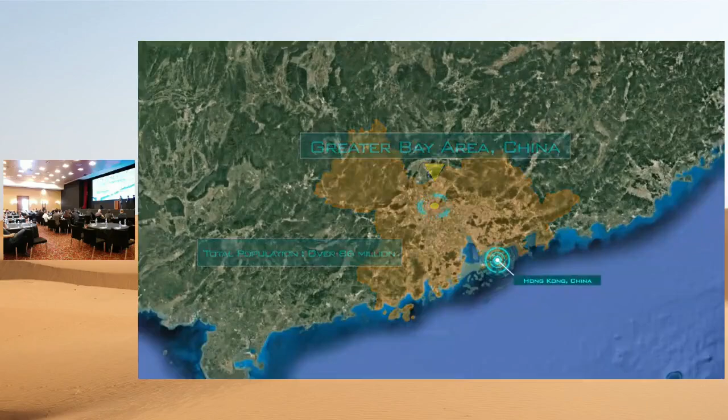This is Simon Lee, Director of Kai Tak Sports Park Limited. We are deeply honored to be here today to share with you Kai Tak Sports Park, an integrated sports, cultural, and entertainment facility in Hong Kong. The entire sports park covers an area of 28 hectares. It is part of the redevelopment of the former Hong Kong International Airport in Kai Tak.

It aims to serve its users and visitors, both foreign and domestic, and including the Greater Bay Area in China, with a population of about 86 million. Kai Tak Sports Park is a design, build, and operate contract, with Hip Hing Engineering appointed as the design and build contractor. The sports park featured a 50,000 capacity main stadium, an arena hosting sports and entertainment events, together with a youth sports ground, all complemented with extensive green and open area.

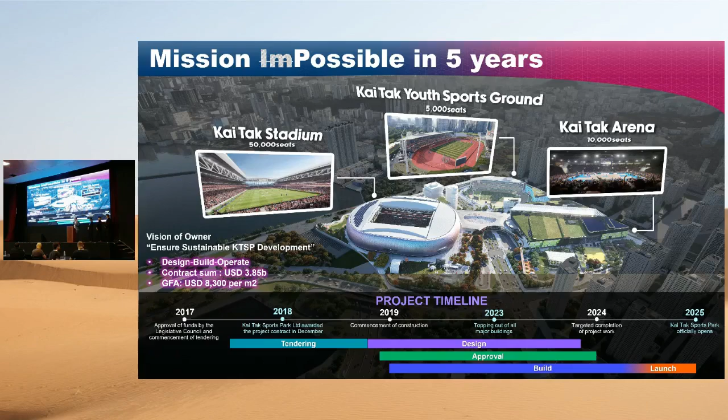Without the adoption of the openBIM approach, it is almost impossible to complete this project in only 5 years. A project at this scale and complexity requires expertise and professional know-how from a team of designers, contractors, and most importantly, BIMers. During the process, we have put together over 500 BIMers from around the world, all working together as one team. Just for Hip Hing themselves, at the beginning of the project, they managed to put up a BIM management team of over 50, whom eventually have all acquired the openBIM professional certificate.

These achievements encourage us to make further steps as we move on and bring our openBIM strategy in future projects to yet another level. Now I turn over to Billy. Thank you, Simon. So, hi, everyone. I'm Billy from Hip Hing Construction.

So for this project, we have many modularized parts in the sports park. Starting from the roof to the ground, we have a retractable roof system and the facade lighting system to brighten the Victoria Harbour. And the retractable roof system also can accommodate different weather conditions. And besides, we also have a mechanized seating system and the lay and play turf to accommodate different activities and events.

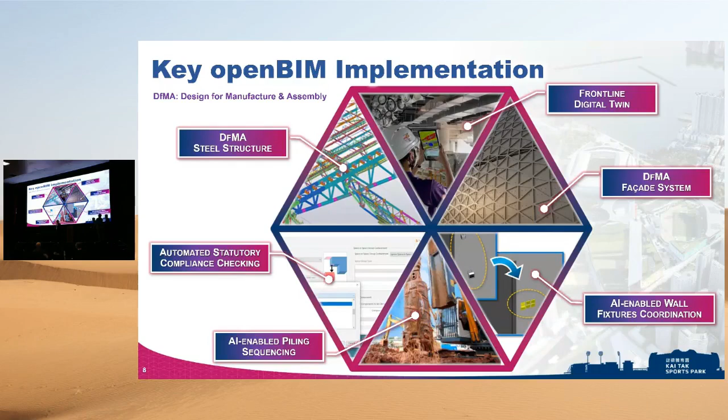And on your right-hand side, from the architecture perspective, we also use AI to help us speed up the wall fixture coordination and joint generation. Also, the facade system uses the DFMA concept to optimize the design. And last but not least, the digital twin: we use the digital twin to do the site verification to help make the works faster and smarter.

And this is our software ecosystem. Today, we are in the construction category, so we'll focus on construction parts. And in this project, actually, we have 7,000 piles that we had to finish in half a year. In this congested time frame, we had to make sure everything made it on time. At that moment, nearly all the piling machines came to the site to secure our project. And the deepest pile is over 100 meters deep.

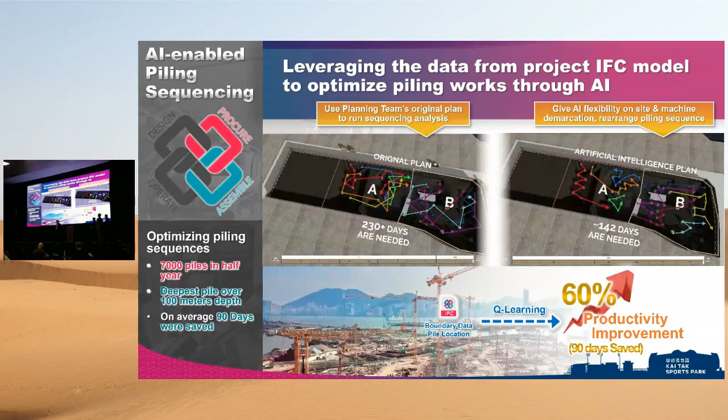By utilizing the IFC standard data structure and with AI we customized ourselves, it helped us speed up the total piling sequence by 90 days. And this is the before and after results. Let me pass the mic to Joe. Yeah, thank you, Billy. My name is Joe Lee.

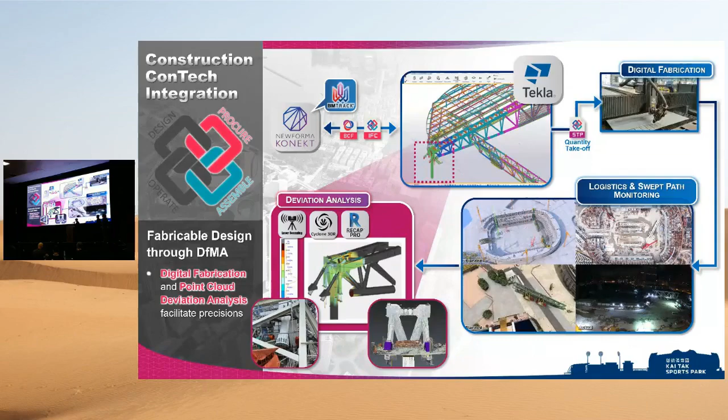As mentioned by Billy, in the openBIM implementation summary, we have adopted digital methods from foundation to superstructure, focusing openBIM in fabrication. Selecting capable subcontractors with digital processes is essential for enhancing productivity and safety. We utilize DFMA for our sports park mega truss construction, which allows for details enhancement through BIM. Frequent data exchange occurred between consultants and manufacturers.

We conduct simulation and quality checks during installation, extensively using laser scanning to ensure the accuracy and facilitate open data conversion.

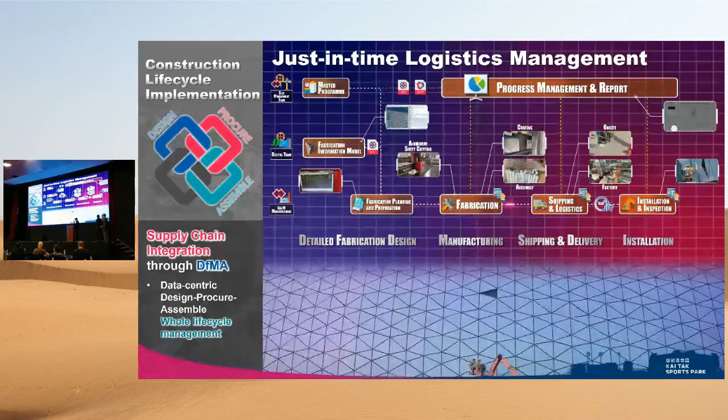Regarding DFMA, one of the big challenges is managing and monitoring the logistic and manufacturing data schedule. We assign the unique code for each facade panel from day one. In terms of monitoring methodology, only an open data format approach enables all dynamic data to go through the entire process. This approach aims to achieve an intelligent reporting system and accomplish the just-in-time strategies.

Furthermore, we established a BIM cave for the project, which has significantly changed the mindset of many of our colleagues, including frontline staff, designers, consultants, and operators. Feedback from them consistently indicates that this marks a significant step forward and enables all stakeholders to utilize BIM across various channels. Clearly, the entire process relies on the openBIM approach. You can see the data and file conversion flow through openBIM in the flow chart at the bottom.

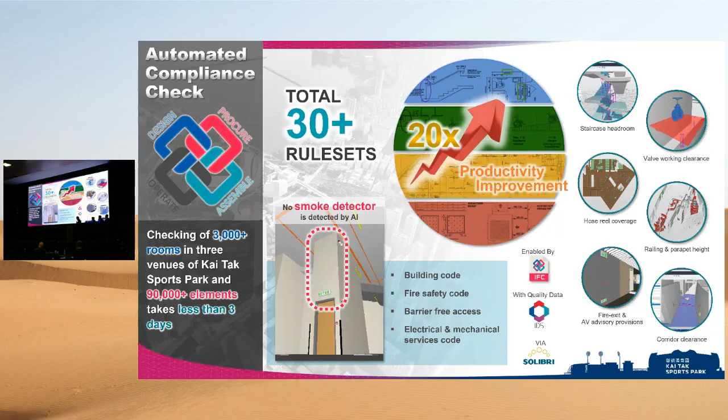This is Kelvin. Other than the construction technology Joe just mentioned, we also leverage the information model onto automation tasks. Under a compact time frame, design and construction detailing must be conducted concurrently. It's crucial that each detailing iteration can both fulfill requirements and be constructible. With quality data in the IFC model, over 30 crucial rule sets were developed to facilitate statutory compliance checks. This example shows a smoke detector is not found near the exit door, which is a local statutory compliance requirement. 90,000 elements in 3,000 rooms are checked within 3 days. This results in 20 times productivity improvement and safeguards code compliance checks along the project lifecycle.

Kai Tak Sports Park is not a typical project, with rooms mostly not repeatable. The sports complex has extensive IT infrastructure design. Huge amounts of wall fixtures need to be coordinated aesthetically and for constructability. With 1 week of proof of concept, the general coordination of over 100,000 wall fixtures in 5,000 rooms is completed in 6 months through AI. 12 months were saved, and it's equivalent to 3 times productivity improvement. Through quality project data in open formats, innovation is catalyzed, and we were able to think deeper and further to achieve more.

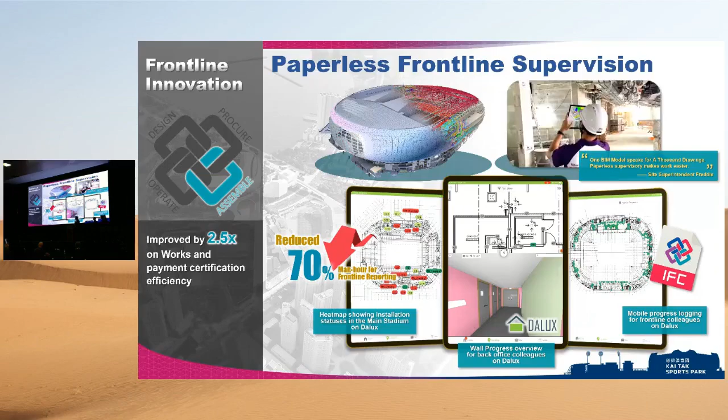Other than data openness, frontline and back office teams are also seamlessly connected in this mega project. Through IFC-compatible lightweight mobile platforms, the team can share progress and information, facilitating paperless progress monitoring and inspection, as well as works and payment certification. The extensive availability of open data also enables the team to set up a platform for data-centric analytics and a management portal. From various sources, data are extracted, transformed, and loaded to provide information for prompt decision-making processes, which include progress monitoring, environmental monitoring, and safety management. Through Esri ArcGIS, this data can be further augmented with IFC models, helping the team to be comprehensive in site management in terms of progress, safety, and sustainability.

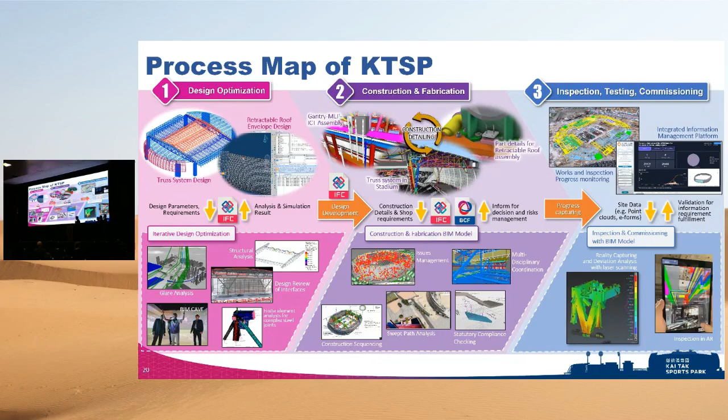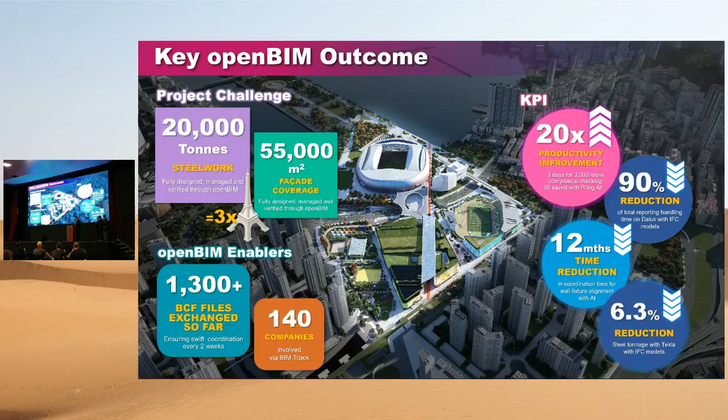This is an overview of some key processes along the entire project timeline, until where we are now at the final commissioning stage. With open formats such as IFC and BCF, the team's construction expertise has been utilized efficiently in this mega-scale project, permitting information exchange between processes to improve project efficiency, from design, procure, assemble, to the current imminent operation stage. In this project, which is extensive in facade and steel systems, equivalent to 3 times the Eiffel Tower's steel tonnage, project efficiency has been enhanced via more seamless collaboration amongst over 140 parties connected via the BIM-based BCF format. This has helped us in various project execution metrics, such as 20 times productivity improvement, 12 months reduction in manual coordination time for wall fixtures, and a 6.3% reduction in steel tonnage of the design.

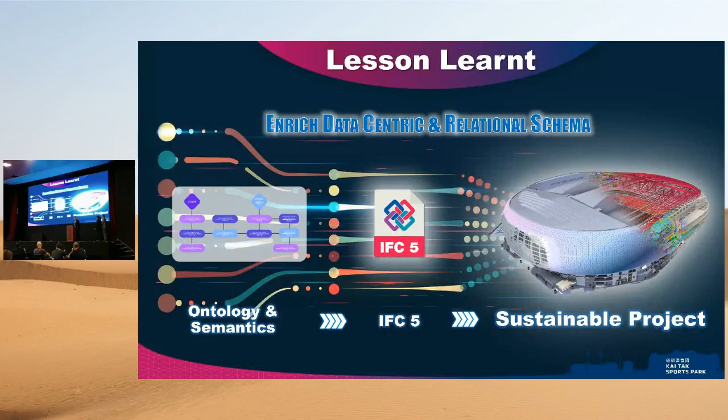In the journey so far for the Kai Tak Sports Park project, for a project of this scale and special nature, the team has learned from scratch the relationship of data, assets, and systems that are unique from other types of common developments. In addition to today's opportunity, we will continue to gather and share our lessons learned with the openBIM community for the coming developments of the next generation of IFC.

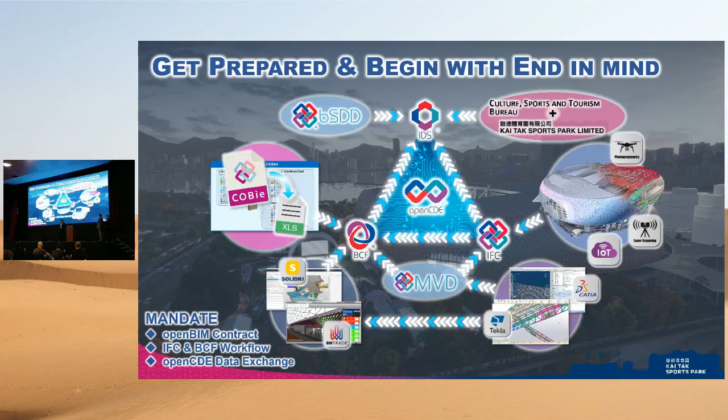It's just like the Rugby 7 match. We should have a policy. The IDS and bSDD set up the rules of the game at the beginning, and we should have a process and strategy by utilizing IFC and BCF. And last but not least, people. People are very important. They should get well trained before they start this rugby match, so make sure to get a professional certificate.

And the most important thing is we should have a platform. An open CDE platform will help us centralize all information together. It's just like the rugby court.

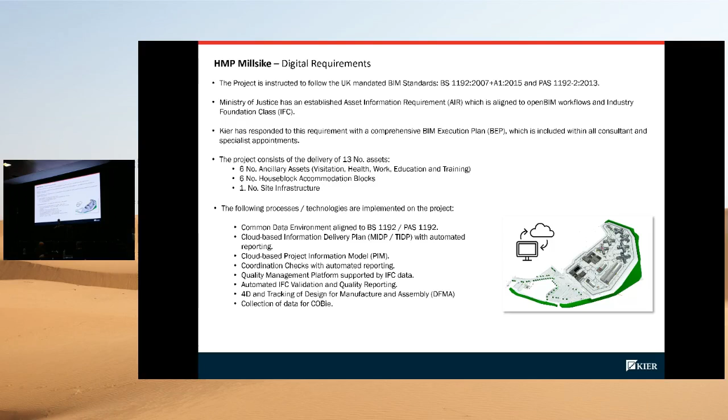We also have a quality management platform, which is supported by IFC, and we use that out in the field to have a paperless site. And we've got automated IFC validation and quality reporting with Power BI. In addition to that, we have 4D, and we've also managed to track all our DFMA components with a digital twin as well. And finally, after we've collected all that data, we are producing COBie.

So some information about our BIM information. This is our model breakdown. We have approximately 205 models. It might change because we've got handover in 4 months and we've got a few tweaks left to do. We have 13 overall asset models, and you can see them there, each with their little red tag against them.

Currently in our project information model, we have over 14 million lines of property data. We have 1.5 million classification codes, so that's Uniclass, NRM, SFG20. SFG20 is the maintenance regime classification system that's used in the UK. We've exchanged over 234 BCF files. We've resolved about 5,730 clashes.

Now, when we add our whole data requirement, which includes all sorts of things within the IFC file, so including layers, classification codes, properties, attributes, we're looking at 34 million lines of data that we're checking every 2 weeks. So that's quite a challenge, and to do that in Solibri is very difficult, particularly when we are a team of 3 people. So what we've done is we've built a data quality pipeline. So we've been able to ingest the IFCs, and we've been able to validate them automatically.

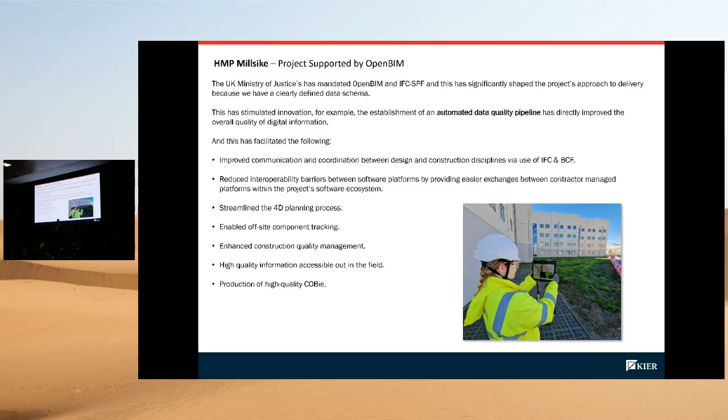So what we've been able to do, because we have openBIM on the project, is we've been able to improve communication across the board. So we have access to information from all sorts of applications, and I'll show you the software map in a minute. We've reduced interoperability barriers between those platforms because we have an open environment to work with. We've streamlined our 4D planning process. We've enabled our offsite tracking. Obviously, we've got quality management, and we're using those models out in the field, as you can see in that nice little picture. And we were able to produce COBie.

So what does that pipeline look like? We've used a combination of Python, IfcOpenShell, and Power BI. And we've effectively built an automated pipeline to be able to check, validate, and clearly communicate the client's data requirements. This has simplified, sped up, and automated the whole check-in process. And we've done all this before the development of IDS was a thing. So we thought we were a step ahead of the game, and as usual, we're not.

So the great thing about this is that we've been able to take the IFC data and visualize it in Power BI. We've been able to educate and upskill our whole project team. That's improved the knowledge of IFC quite dramatically. And because it's in such a simple, easy to use format, which I'll show you in a second, it's really boosted our ability to deliver this data. And it's also starting to give us the confidence and the assurance that it can be relied upon within our other applications. Because part of the challenge we've always had is the I in BIM, and people not believing or not trusting it. And therefore, this process that we've developed really helps that.

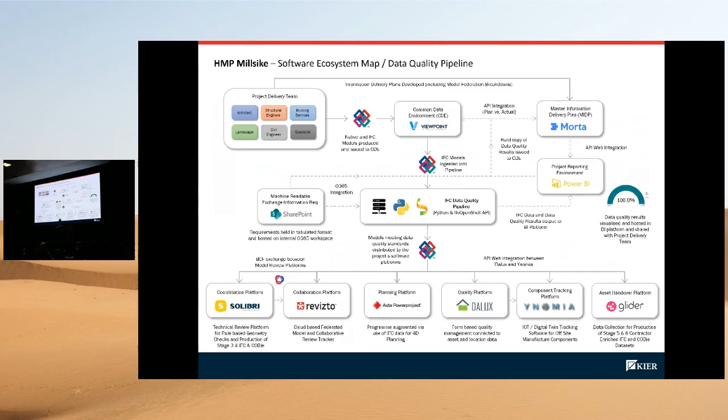So unfortunately, because it's a live prison, I can't really show you any of the live application or any of the data that's in there. So some of the stuff in here is blurred out, unfortunately. But effectively what we've got is a report that's in quite a simplistic view to begin with. And then we can drill into individual models or disciplines or particular parts of a model file, and we can see a summary of the data quality.

Everything here is presented in plain language. So if there is a problem, it tells you what the problem is. For instance, if it's a duplicate value, it will just say it's a duplicate. What we're trying to do here is dispel the issues that we have with complexity around rule sets and general BIM, and just get to the root of the problem.

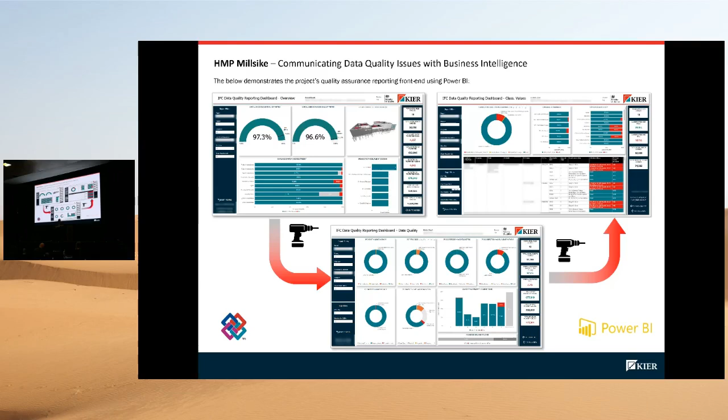So once we do that, we can then drill into the data. We can then report on that, and that gives people sort of a punch list to fix. So sort of our key outcomes from the project.

So overall, it's reduced complexity, like I've said. We've got better reporting upstream. So I can now report to my boss, have we got a good or bad model? I can say we've got a really good model, we've got a really bad model. We can also report downstream to the model suppliers and tell them precisely what's wrong. This has sped up the whole process. It's fully automated. It's literally 2 buttons to press.

So we've removed the need for manual reporting. It's all hosted online, so it's easily accessible within our security requirements of SharePoint, obviously. It's boosted the overall understanding of IFC. Basically, we've removed misunderstanding from the project because all parties are on the same page, because we're all singing from the same hymn sheet.

So some of the things that we've been able to do, and I've got 3 minutes, so I'm going to rattle through these now. So because we have high quality data in our models, the IFC entities, predefined types and classification codes, we've been able to implement a really cool checking system where we can check certain objects against other certain objects. And when we pick that up, we can share that via BCF into Revizto. We've got almost 250 active users in the platform, and like I've said, we've cleared off 5,000 clashes.

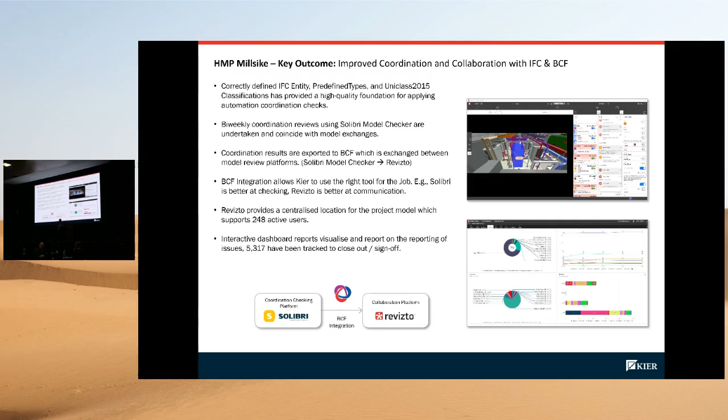So our Vynomia component tracking, which I think is very, very clever tech. What we've been able to do is connect Vynomia, which is a DFMA platform, to our common data environment, to Dalux, and what it does is it tracks the components from manufacture to install. And it also tracks design as well. So here in this little card at the top, you can see if the design is rejected, accepted, and also whether or not it's been installed on site, and it's all connected via nice integrations.

Now, we wouldn't have been able to do this without IFC because the information checks that we have in place allow us to validate to make sure we've got uniqueness in every single one of those precast panels. If we didn't have that, we would really struggle.

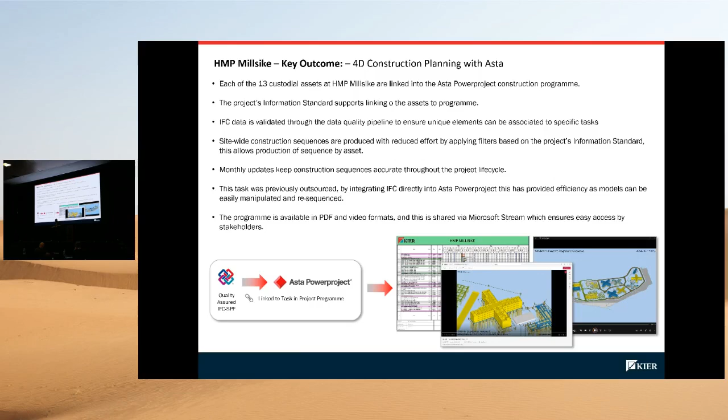So another problem solved here is that because, again, we've got high quality models with a lot of spatial data in, we've been able to streamline our assets and link it back to program using the unique identifiers that have been specified by the client. We've done this with Asta. It's still quite a manual process, but we've done some cool stuff by linking the programs into Microsoft Stream and sharing it across the project team.

Finally, the last slide, I've got 1 minute left, so I'll try and wrap this up really quickly. So we have Glider BIM as a platform. It's a digital handover platform that allows us to enrich the data within our IFCs. Throughout the whole project, we've been progressively collecting the IFCs, checking to make sure they fit the schema that we've been issued. And once we are sure that they fit the schema, we get all those entities work packaged, split up, divided, and sent out to trades.

Trades then will come in to enter all of the serial numbers, all the warranties, all the barcodes, all that sort of good stuff that we find on site. And then we collect that via the Glider BIM platform, which then allows us to enrich the IFC files and output the data to a really high standard, and then produce a COBie document, which we issue to the client.

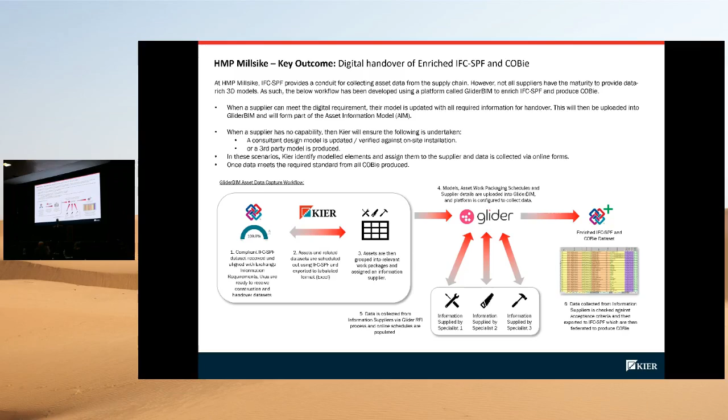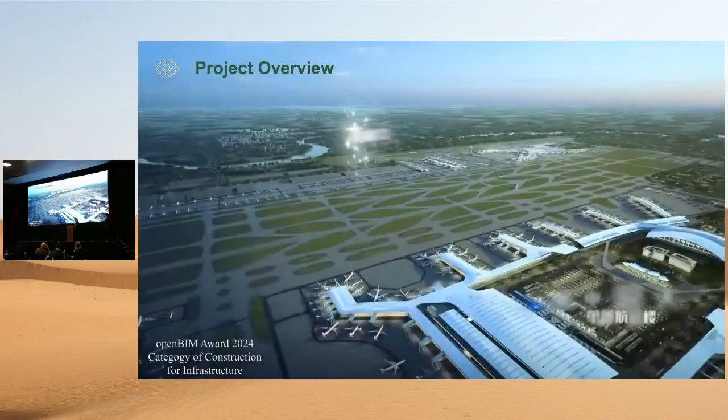Guangzhou Baiyun Airport, one of the 3 major hub airports in China, ranked first in passenger traffic in China for the last 4 years and globally in 2020. Its third phase expansion project, with about 7 billion euro investment, includes 2 4E-class runways and the largest single terminal building, making it China's largest ongoing airport project.

As this is a large-scale and complicated linear and vertical airport project, we have to deal with collaboration issues among a diverse range of engineering types and numerous stakeholders. By identifying key challenges, we adopted openBIM standards and formulated a tailored solution: IFC for data exchange across different software, bSDD for standardized terms, IDS for consistency of information requirements, BCF for easier communication and issue tracking, and OpenCDE as a single source of truth.

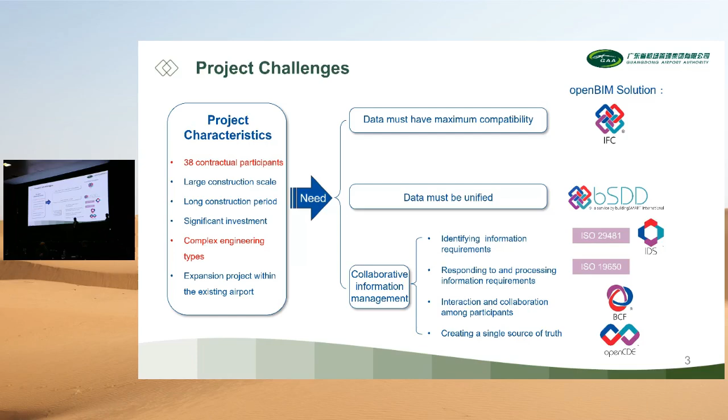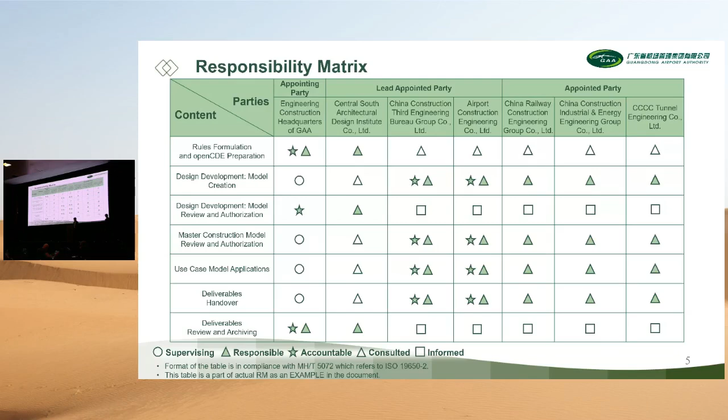By in-depth study of openBIM standards, international standards, and industry standards, we established our project's standard ecosystem. It integrates various requirements from project management, data exchange, and execution level, providing strong guidelines for decision-making. Here's the responsibility matrix of the project, following ISO 19650, which plays a key role in project management, not only in decision-making, but also helps prevent overlap and supports accountability.

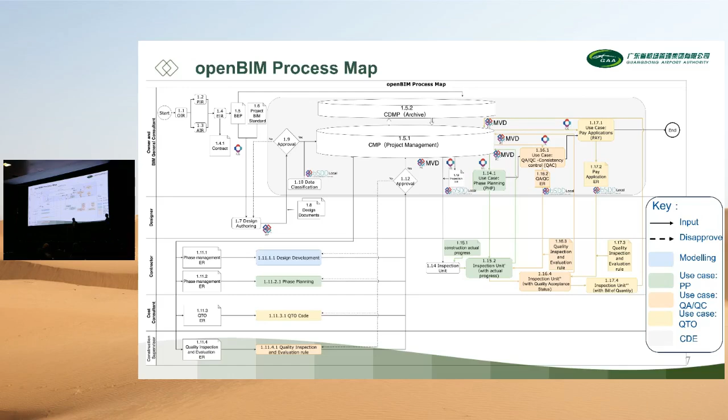In the project's openBIM process map, the entire workflow starts from the responsibility of each participant. The core of model-based construction management is to focus on 3 main applications: progress management, quality management, and payment management. Technical applications developed for openBIM involve the management of data and eliminate disconnected workflows. We established a construction management platform which serves as the CDE in this project, referred to as CMP. IFC is used as the intermediary data format to manage and store model files in CMP. We also adopt an IFC validation service to improve data accuracy.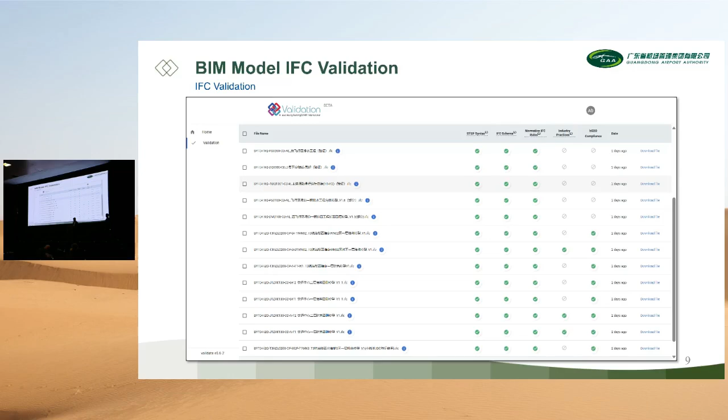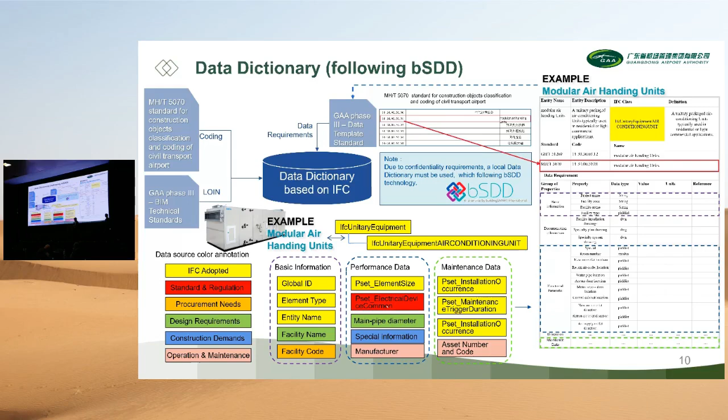Since the working language for project implementation in China is Chinese, and due to confidentiality requirements, we could not directly use bSDD. However, we follow the bSDD technical framework to establish a local data dictionary. Based on the objectives and scope outlined in the BEP, we sought out information requirements from the project's whole life cycle. For the general data already published on bSDD, we translated and adopted it. For personalized data which needs extension, we extend the requirements to formal data templates. Currently, we have already completed over 5,000 data templates.

Here's a list of use cases in the construction phase of the project. Today, we are going to share some special ones. Non-suspend flight construction must be one of our core targets, as this is an expansion project, and we have a tunnel project across 6 operating runways. So how to ensure the normal operation of Terminal 1 and Terminal 2 is crucial. Models from different vendors were integrated with IFC files to form a simulation model. Combining shield tunneling technology, construction schedule, and real-time flight information, we developed a non-suspend flight construction plan. Relevant data was published and exchanged on the CMP, enabling the following execution and supervision works.

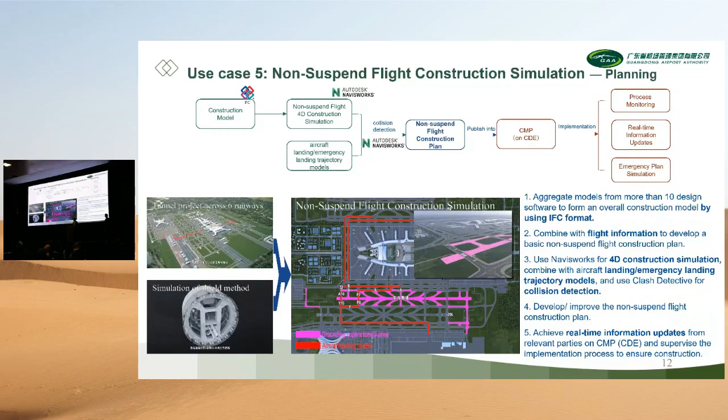Additionally, electronic fences based on BIM and GIS data were adopted in CMP to replace physical barriers in sensitive zones.

Use case 6 is an innovative practice of this project. For most cases in China, construction is still carried out in a traditional way, highly reliant on construction drawings, which makes the BIM model just a 3D visualization tool. It is crucial to change this situation by finding a convenient and efficient way to connect construction works and model

units. Therefore, we established this use case, where we match a group of model units with a real object in inspection nodes, which we name inspection units, to realize model-based construction and acceptance. To do so, we adopt the ISO 19650 management approach for model breakdown planning and the openBIM workflow for project data delivery.

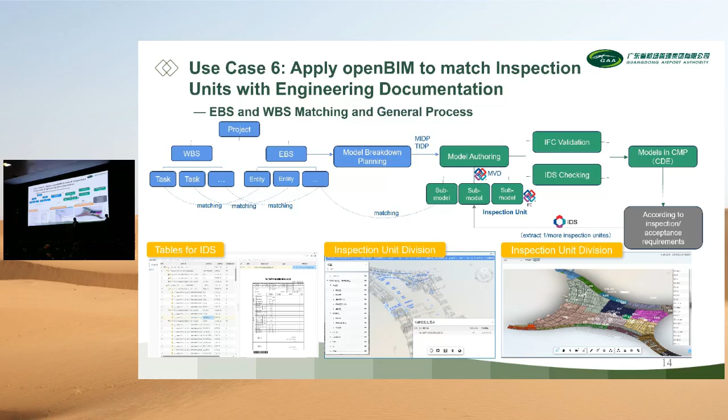Additionally, inspection units should have flexibility to adapt to the ever-changing conditions of construction sites. Hence, we extract relevant data and deliver the requirements to CMP via IDS. By flexibly combining and modifying related data in CMP, inspection units become more practical in real cases. In this process, IDS provides a precise description of information requirements, improving the alignment of information production.

To realize inspection unit-based construction management, it is necessary to predefine specific execution requirements in use cases. The execution criteria and rules are mainly from professional standards and have strong correspondence with relevant data in inspection units. By establishing an effective mapping relationship of them within the IFC schema, the efficiency of highly repeated works in quality inspection and quantity takeoff has been significantly enhanced.

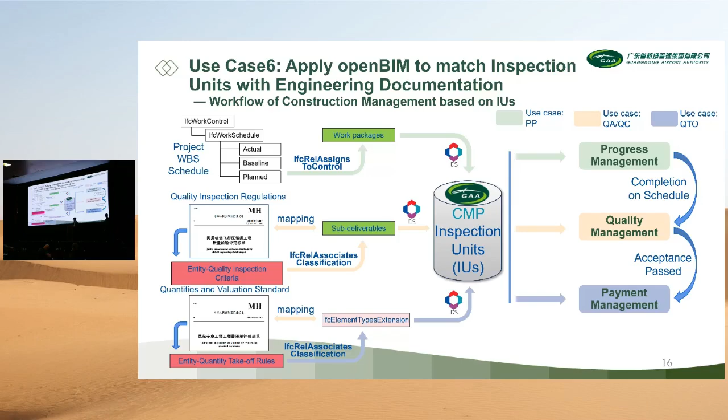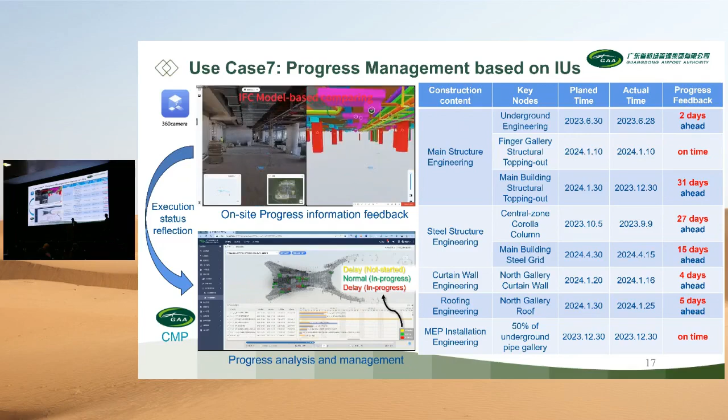For execution of progress management, managers can use 360-degree holographic images to match IFC models in the CMP to assist in construction progress management. IDS extracts the engineering object data that match the on-site construction conditions and continuously updates the data on the CMP, enabling real-time alerts and reminders. Impressively, most construction works were completed on time or even ahead of schedule.

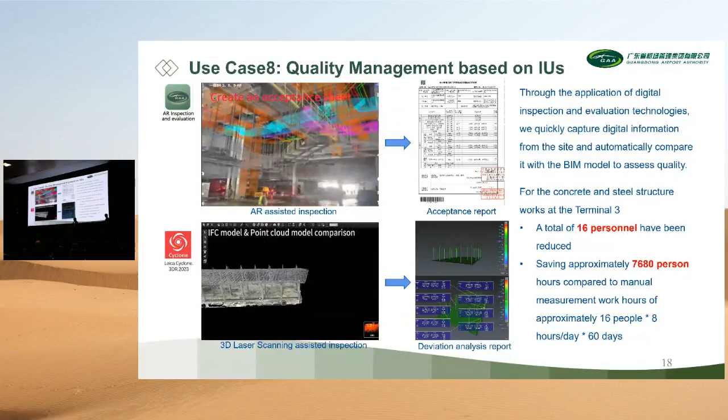In terms of quality management, by scanning QR codes to match the real object and the model, relevant model attributes and acceptance requirements can be quickly obtained. The AR tool can also conduct simple measurement works, and the collected data will serve as an important basis for acceptance materials.

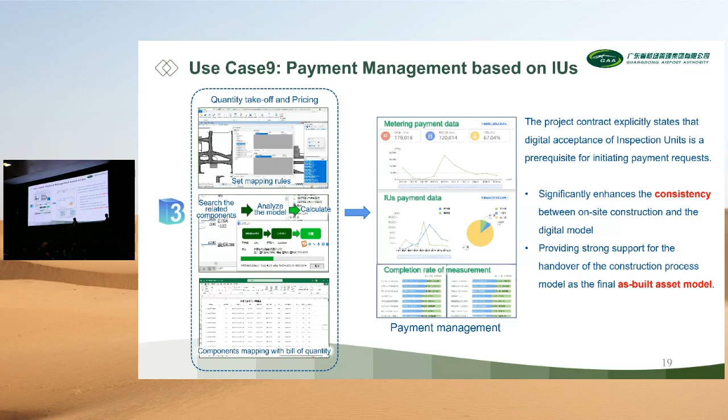Once the inspection units from quality management pass acceptance, the payment request can be initiated. The quantity takeoff software will generate the total price of each inspection unit by assessing model quantity, loss factor, and unit price, then publish it on CMP to assist payment management. All payment details can be tracked and finally summarized in the payment management dashboard.

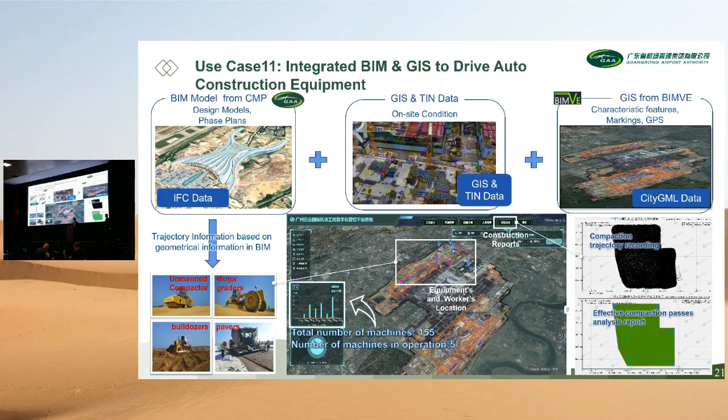In this project, a large number of intelligent devices are used for construction, with the most notable benefits coming from automatic plastering robots, with higher efficiency and better quality than manual works. To achieve more efficient intelligent device management, we seamlessly integrated GIS with BIM. Using IFC geometric data, we planned optimal trajectories for intelligent equipment, while GIS enabled real-time positioning and full-site operational monitoring. This not only gave us full control over the equipment, but also made the site management smarter. Here are the other use cases.

By comprehensively using openBIM, this project has achieved remarkable benefits. By adopting IFC, software collaboration numbers increased from 10 to 55, especially for some Chinese native software used in this project, which was established by some small-sized software vendors. These open and vendor-neutral resources contribute to the software diversity in the built asset industry.

Based on the more efficient and precise model-based collaboration methods provided by BCF, the coordination willingness of the model authors has significantly increased. Over 27,000 markup files have been exchanged, enabling designers to optimize a large number of design issues within a very short design cycle, thereby significantly enhancing the quality of decision outcomes. The comprehensive benefits are also quite outstanding, with notable achievements in saving investments, optimizing design, improving space utilization, enhancing measurement accuracy, and using smart devices to increase work efficiency.

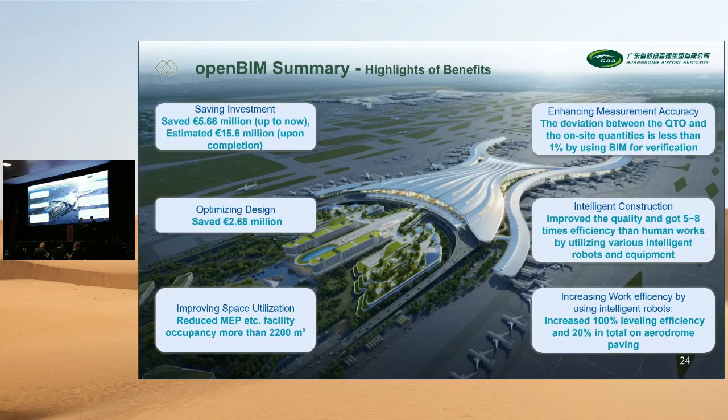In 2020, we organized over 40 key engineers to obtain PCERT certification. In 2022, we collaborated with BIC, CRBIM, and CCCC to take part in the CNBSDD project. In 2023, we invited buildingSMART International Chairman Ian and COO Kelly to GAA for our openBIM. In 2024, we attended the buildingSMART International Spring Summit and gave a presentation in the airport domain. Now we are proud to become the 10th SAC member.

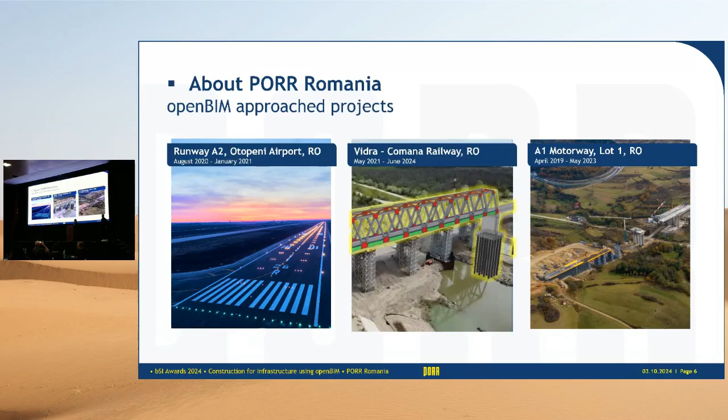In PORR Romania, we've been involved in several large-scale infrastructure projects, and we take pride in our openBIM approach. Some of these key projects that we've delivered using openBIM include the A2 runway from Otopeni Airport, the railway from Vidra to Comana, and the motorway A1, which is the subject of today's project.

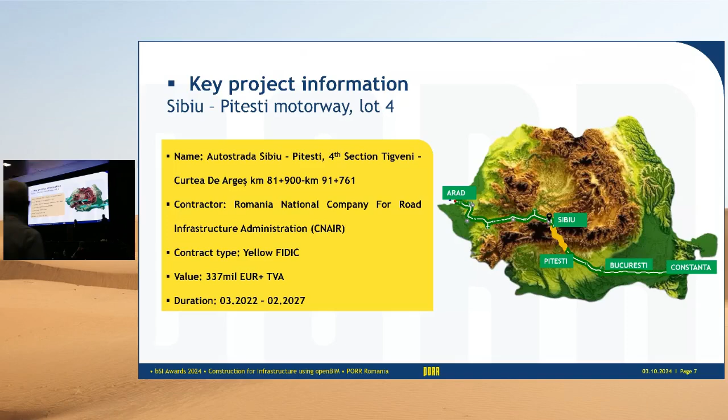Now let's move on to the project that hosts our openBIM solution, the TransCarpathian Motorway, specifically the 4th section from Tigveni to Curtea de Argeș. This is a critical part of Romania's infrastructure. This section is part of the Pan-European Corridor 4 and has a value of over 337 million euros. PORR Romania is acting as a general entrepreneur, and the project type is design and build.

This project is not only about building a road, it's about how we are using openBIM principles for this project. Now I'm going to pass the stage to my colleague Dan. Thank you, Irina. Hello, everybody. My name is Dan, and I'm here to quickly, hopefully, go through all the use cases we've prepared for you. Okay, so let's start.

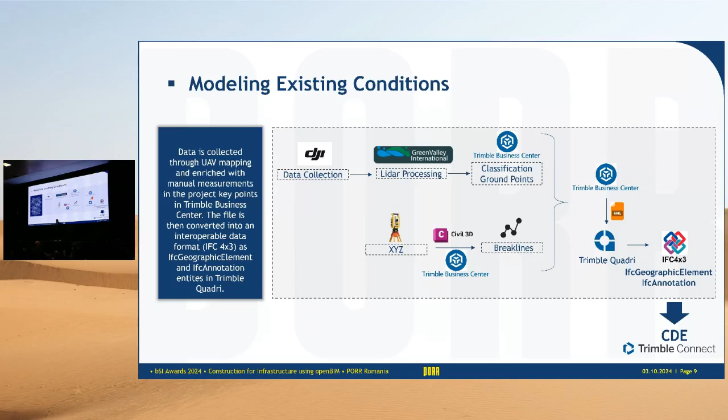Modeling existing conditions. What we found from previous projects is that it's essential to understand the location of the future site. So that's why we did drone flights with LiDAR scanning, but also normal surveying methods like GPS and total station of the existing features on the ground, like roads, buildings, and then combined them together in Trimble Business Center, exported that newly created surface, and then through Trimble Quadri exported it as a new IFC 4x3. This will be a recurring theme with IFC 4x3.

Okay, 3D coordination. Of course, we consider that in any BIM project, 3D coordination is essential. Basically, we created a comprehensive ecosystem map which allows us to federate different models from different disciplines, but also different stages of the construction process. For our common data environment, we have chosen Trimble Connect, and this is where we federate all these models. And this allows us to have better collaboration with our colleagues on site, but also to quickly identify and see clashes that we can resolve in order to ensure a much smoother construction process.

Okay, data migration. Unfortunately, from our designers, we are only getting some very basic IFC 2x3 files. Basically, all the elements there are IFC building element proxy classes. So then we are taking these files in BlenderBIM, now called Bonsai, and mapping them to the correct classes, IFC columns, beams, whatever, but also adding properties, materials, IFC groups, and classifications using bSDD. After that, we are going a step further, and via Quadri, we are actually converting them to IFC 4x3 and adding specific IFC 4x3 elements like IFC linear placement, IFC alignments, and other custom IFC 4x3 property sets.

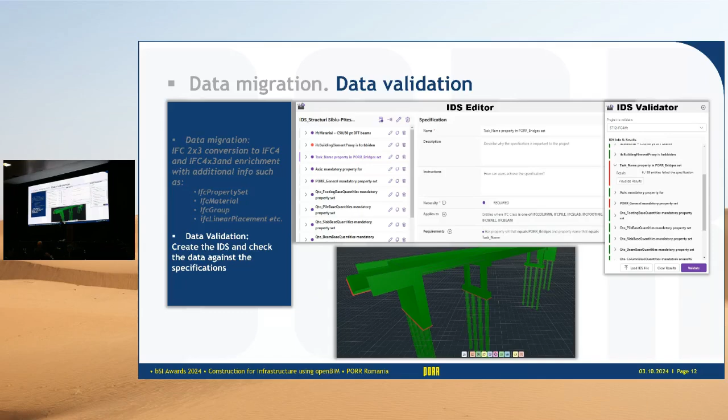Okay, unfortunately, we cannot be perfect. We are only human, so that's why we need to validate our data. So we are very happy that IDS actually exists, and we can check what we did in the previous stage. Basically, we have our own PORR application, an online platform to create and validate the IDS files, to validate the IFC files. And after that process, we can move into more practical use cases.

Let's say quantity takeoff. We can define the planned quantities here. We can get the quantities via Trimble Connect as data tables. But we also create a lot of custom Power BI dashboards. This will be a recurring theme here. So basically, we are taking the IFC and putting it into Speckle, and then through the Power BI connector, the Speckle connector, we're creating dynamic dashboards that allow us to have a much better way of filtering and analyzing our quantities and other types of data.

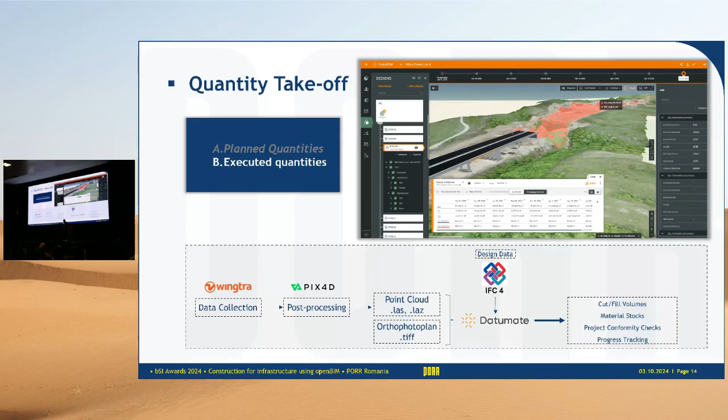As for the executed quantities, on our site we are doing photogrammetric flights every 2 weeks. We are processing the data, generating the point clouds, the orthophoto plans, the digital terrain model, and then uploading them to a cloud platform, which also hosts our IFC files. And there we are able to calculate cut and fill volumes, material stocks, and to track the actual progress of the site.

For the phase planning, we took the planned construction schedule from Primavera, exported it as a CSV, and using IfcOpenShell, we automatically put the information from the schedule into the IFC files. And I'm not talking about custom property sets. We are actually using the correct classes: IfcWorkSchedule, IfcTask, and so on. And then we are running 4D simulations in BlenderBIM Bonsai. This allows our colleagues on site to have a much better understanding of what and how they are going to build the actual motorway itself.

Okay. Site progress monitoring. As I said, Power BI will become a recurring thing in this presentation. So we have two dashboards here, one for monitoring the status of the bridges. We have the IFCs of our structures, and we put them again into Speckle. At the same time, we have one Excel file hosted on OneDrive. Every 2 weeks, my colleagues update the Excel file with the actual execution dates of the elements. Then through Power BI, we link the Excel file with the IFC, and we can see exactly what has been finished, what has been started, what is delayed, and so on.

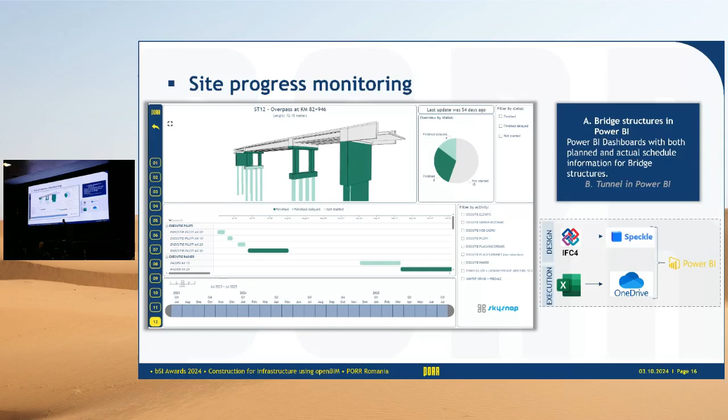And this is presented every month, at the end of the month, to the top management of the company to have an understanding of what's happening on site. And we also have this type of application for the tunnel. By the way, this is the first motorway tunnel that has ever been built in Romania, just as a fun fact. Okay, so this dashboard is a little bit more complicated.

Our tunnel department has developed an internal app called DigiTun, where the site managers log their shifts. At the end of every shift, they put all the information about the shift into this application: how much volume, from where to where, who was working, let's say 80 columns in Excel. So we are doing an export from that to CSV or Excel.

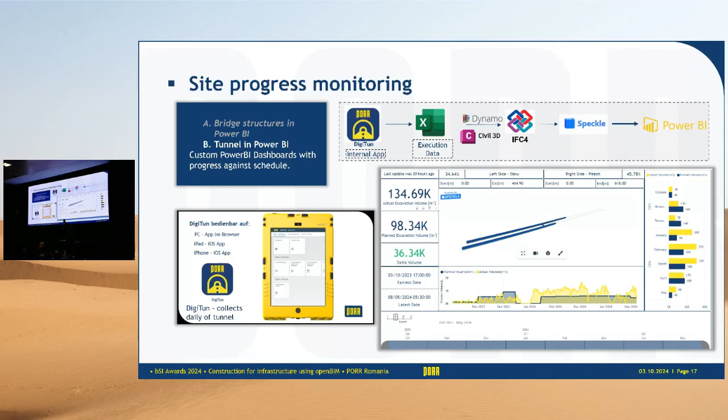And then through Dynamo in Civil 3D, we are taking the model of the tunnel and cutting the geometry exactly like they logged their shifts, and attaching all of the information of that particular shift to the newly created 3D geometry. Then we can export it to IFC and bring it through Speckle to Power BI. Just as a small disclaimer, this was the original workflow, and it worked, but we found that it's easier to go directly from Dynamo and Civil 3D to Speckle to Power BI.

Okay, BIM to field. We have two things here. First, machine control systems. We are putting our design data, the IFC files, the XMLs, the 3D lines, and the surveying benchmark network into Trimble Business Center, where we create the data for the machines in their specific formats, and then via Trimble WorksManager send them to our machines on site. This helps a lot with precision and time. You save a lot of time and effort. We have tested this on multiple sites. The other part of BIM to field is augmented reality.

So we have a device called Trimble SiteVision, which is like a GPS that you connect your phone into. And basically, you can bring the models into real life. So because the models are hosted on Trimble Connect, you are able to go on site, load the Site Vision app, and see the model overlaid with reality.

And then, of course, you can also access the attributes, the properties of the elements, but also it allows for site managers to visually confirm that what we need to build is actually built where it's supposed to be, which is, yeah.

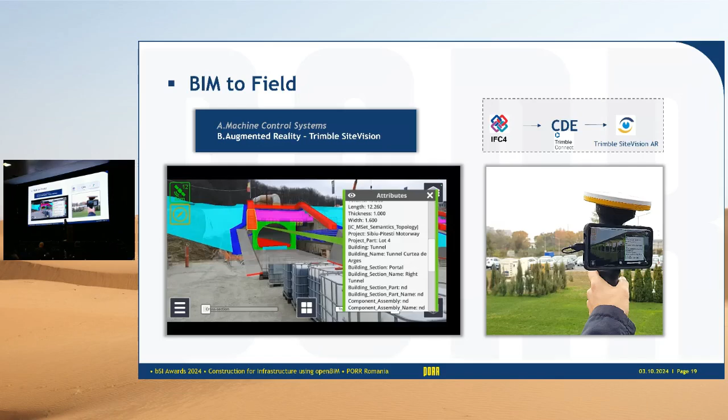The other part, now we go into reverse mode. So we had BIM to field, now field to BIM. So what we are doing on site, we are doing laser scans and also total station measurements, and then bringing that into the BIM environment. So in Trimble Business Center, we are taking the IFC files and the point clouds and the total station measurements and doing so-called scan deviations.

And from that, we get the precision. This column of the bridge has been executed on a horizontal precision of, I don't know, 5 centimeters on X and 6 on Y. And then we are taking this data and leveraging the new common property sets in IFC 4x3, like the properties for tolerance. We are adding that into Quadri to the IFC files and validating the IFC with an IDS report to ensure that they were executed within project requirements.

Okay. Visualization is another, our last use case. So we are taking the IFC files in Quadri, exporting them to FBX, and then in Twinmotion, we create high resolution renders and videos, but we are going actually one step further and going also into Unreal Engine and creating actual simulations. I've tried to recreate GTA, let's say, within the model of the motorway, and it works. It's great for marketing and for shareholders to understand what's happening on site.

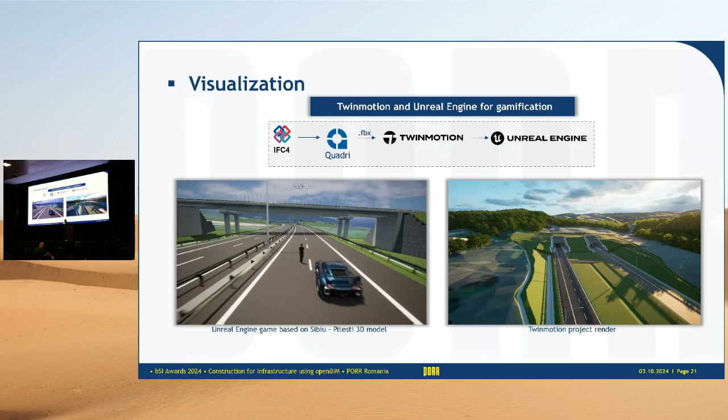Okay, 40 seconds. Those are the use cases. So basically I finished, but this is just a bonus 2 slides. Of course, it's about AI because everything is now about AI.

Basically what we did, we managed to install IFC OpenShell within the ChatGPT environment, and this lets us now create IFC analysis, like generating reports and 4D analysis, taking advantage of the use case I said previously with the work schedules, but also we can edit the IFC, put attributes, properties, and so on.

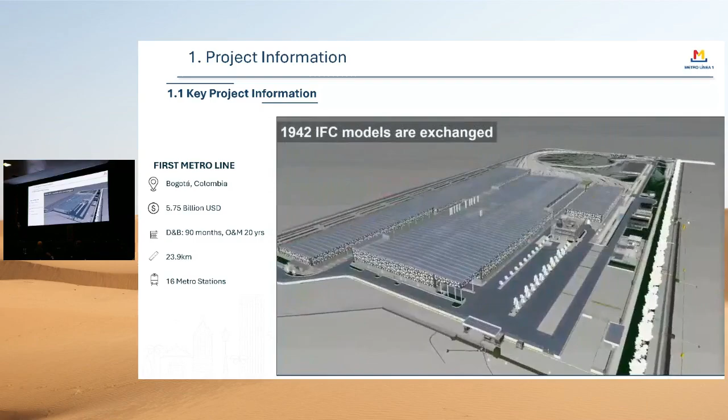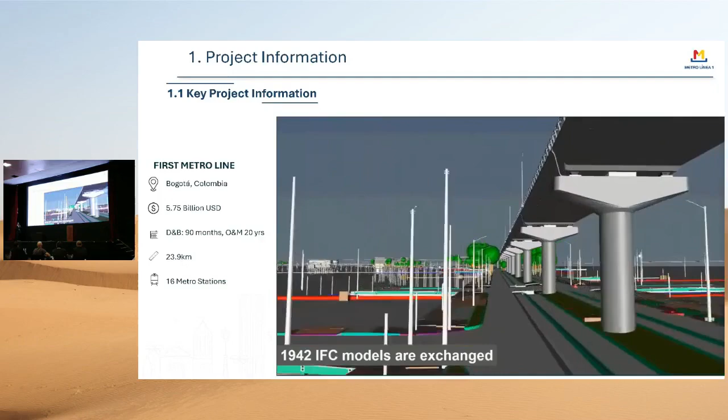Located in Bogotá, Colombia, this project is 24 kilometers in length. As you can see here, all designs are integrated in our ArcGIS system. Up to now, almost 2,000 IFC models are created and exchanged, which include the depot, the urbanism, the viaduct, and the underground utilities, 16 metro stations, and 13 bus rapid transit stations.

As you can see here, all different kinds of geographic information are integrated, which include the orthophoto, the DEM, the point clouds, so as to facilitate better communication and also better decision making.

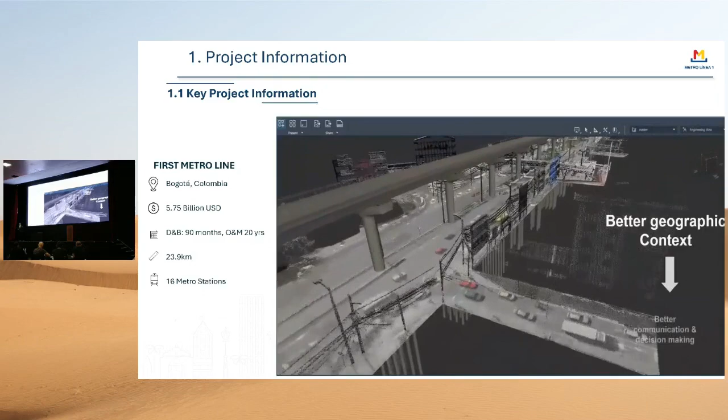Multiple disciplines such as the utilities, the structures, MEPs, and equipment are confronted in this project, which involves multiple different kinds of platforms and software. And according to the timeline, you can see the design, construction, and O&M stage covers almost 28 years.

Hence, the scale and the duration are the two fundamental challenges, which triggered us to think how we are going to be able to manage such quantity of information and how we are going to guarantee the information transmission across different kinds of disciplines and across different kinds of stages. Hence, this project is quite demanding in information requirement, information exchange, information centralization, and information connection.

The good thing is, with the help of openBIM, we have been able to tackle the aforementioned challenges. Actually, 4 openBIM initiatives are adopted in our project. They are BIM open to every software, BIM open to every stakeholder, BIM open to data visualization, and BIM open to every stage. BIM open to every software is achieved by the bSI openBIM solutions, while the other 3 openBIM solutions are achieved by our own customized tools.

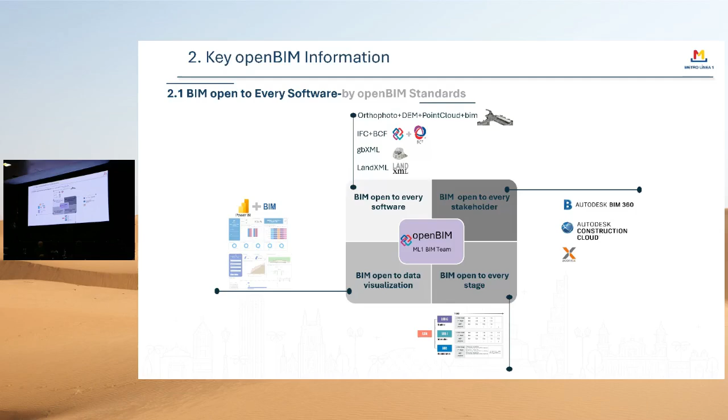As we just mentioned, BIM open to every software is achieved via the open standards in this project, which include the gbXML file, the LandXML file, the BCF, and the IFC. More specifically, from Revit to DesignBuilder, the gbXML file has been used to support us to conduct the sustainability study, which includes the solar radiation study, the thermal behavior study, and the sunlight study.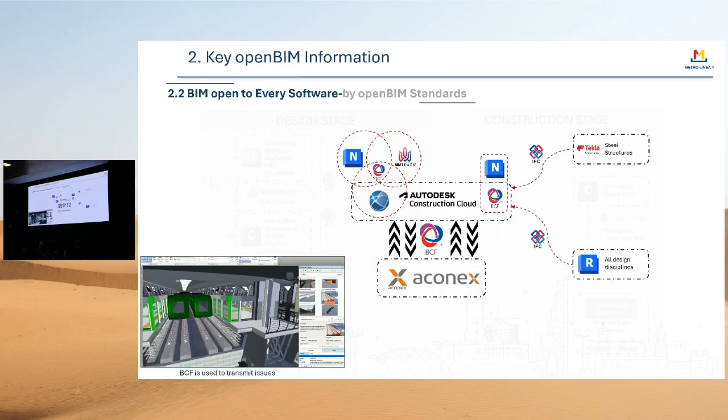BCF was used to support us in the registration, communication, and solving of technical issues across different platforms, including Aconex, ACC, and Navisworks. IFC is compulsory in our project, as defined by our contract. As you can see here, IFC is used to support the communication and the model review in Aconex, which is used by our clients.

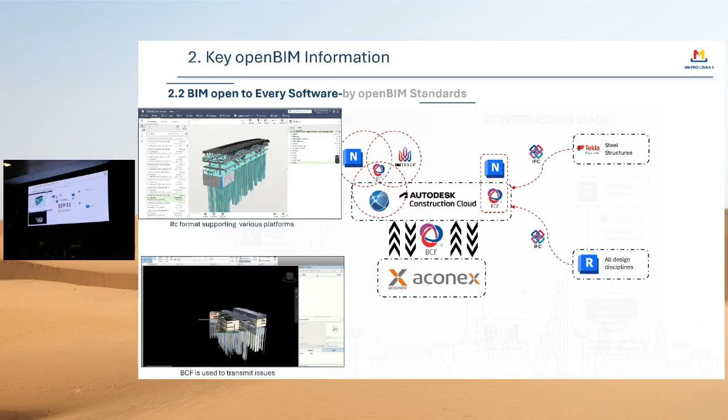Besides, IFC models are used as the input in Tekla to deepen the geometry of the steel structures. For example, based on the LOG 350 IFC models, we further deepen the geometry of the steel structures by adding more connection details. After that, we export the IFC models so they can be supported in different platforms.

As for being open to every stakeholder, BIM 360 and ACC are established as our CDE for all of our appointed parties, facilitating collaboration and centralizing the information. Aconex is used by our clients, as it helps us with quite good version control. Right now, we have almost 40 contractors from 6 countries involved in our CDE.

With so many contractors involved in our CDE, and considering the fact this is a linear project with a length of almost 24 kilometers, it is quite important to have a data collection platform. So with the help of the Revit and ACC API, a customized data collection platform has made it possible to collect the site data. By doing so, we can open our BIM to all the sites.

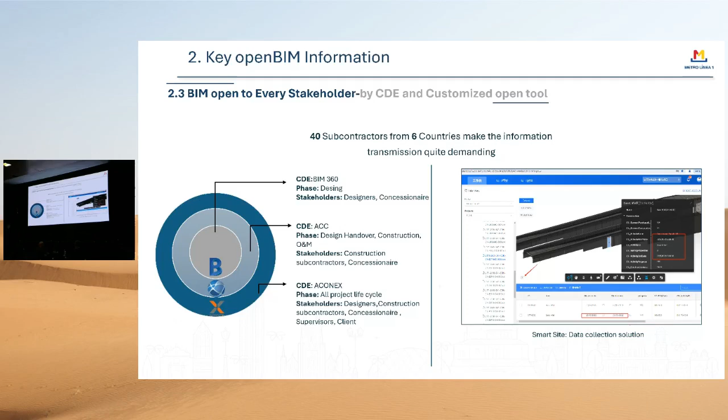More specifically, for example, we can collect the site progress data. Thus, we can open our BIM to our planning team for them to use it. And as you may know, we are currently in the design optimization and construction stage. Hence, we still have many models unfrozen.

Hence, it is quite important to have up-to-date federated models to guarantee all of our stakeholders always have access to the most up-to-date and integrated information. With the help of the ACC API, we have achieved automatic federated models, enhancing our efficiency, and more importantly, we can open our BIM to every stakeholder in time.

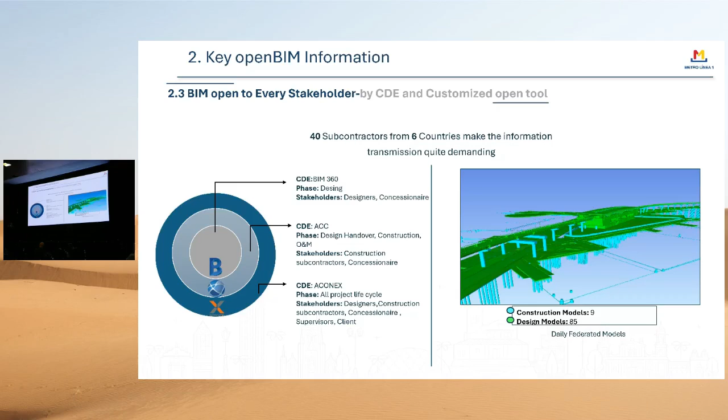This is an example of the federated models, the federated model of one of our metro stations. As you can see, 9 models are from the construction models and 85 are from the design models. But as time goes on, we are going to replace all those old design models with new construction models.

The next is about BIM open to every stage. The duration of this project is quite long, and BIM models are always used as information carriers across the life cycle of the project. Hence, we have defined the parameters or information for different stages of the project in the LOI table, the level of information table.

In our design stage, we proposed the parameters for the construction stage and the O&M stage, and we are going to collect the corresponding values with the help of the data collection platform in the construction and O&M stage. Here is another use case about being open to every stage. In our design stage, wet utility was developed in Civil 3D, but we plan to convert it into Revit for better geometry development and information management.

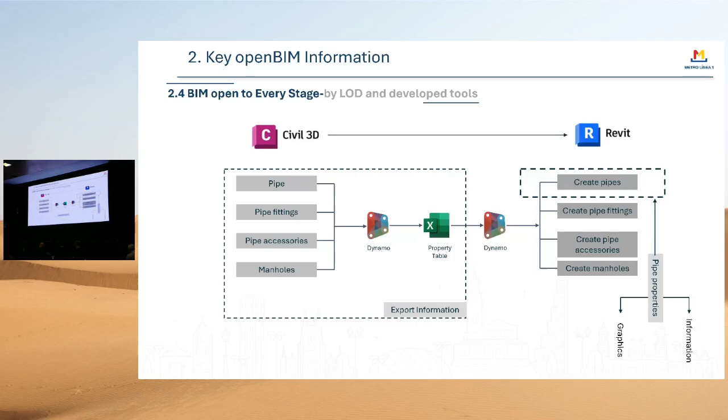Hence, with the help of Dynamo, we convert the information of the pipes, pipe fittings, and the manholes into the Excel file, for example, and then we further turn it into our Revit automatically. Let's have a look at this video. Let's take the pipelines as an example.

So with the help of the Dynamo and Excel file, we have been able to transfer that kind of BIM model information from different stages, from the design stage, the Civil 3D models, to the construction stage, the Revit models. So according to this video, you can see through our customized tools, we basically achieved the optimized modeling of the pipelines in our Revit environment.

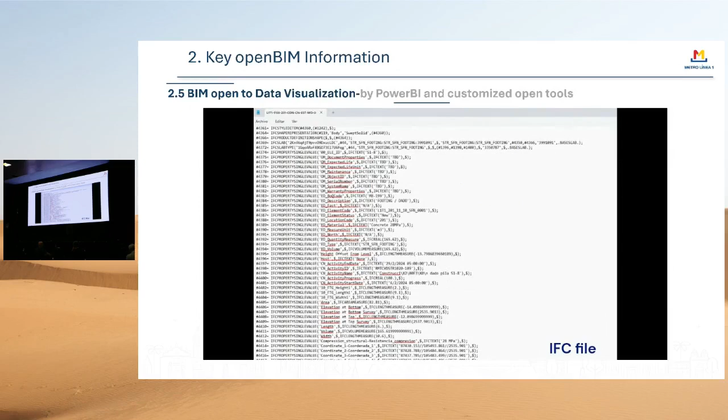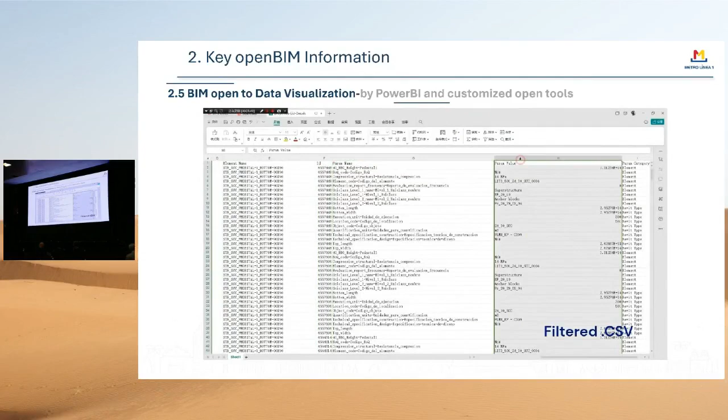The last part is about BIM open to data visualization. So to facilitate the decision-making based on the BIM data, some specific parameters are extracted with the IfcOpenShell. And then those parameters are analyzed in our Power BI. And then the corresponding dashboards are published in the ACC Insights cards. By doing so, we literally bring the BIM data business to every person.

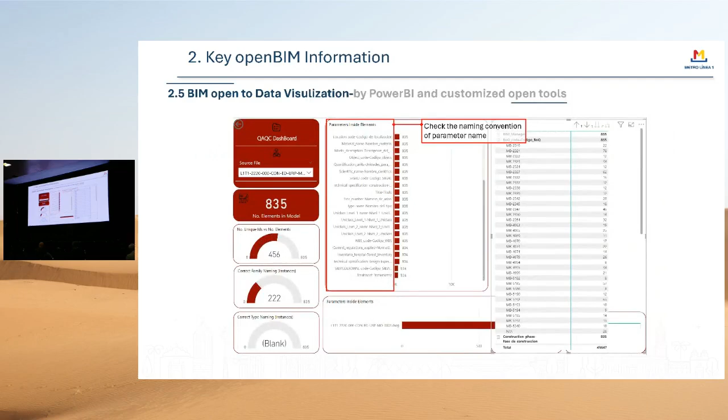This whole video basically shows us the whole process, how we turn the BIM model data into the dashboard so as to be used by all the stakeholders in our project. Let's take a deeper look at this dashboard. With help of the dashboard, we can first check if all the parameters are following the naming convention, for example, and also we can check if we are missing some parameters. Let's have a close look here.

For example, the technical specification parameter, which is defined as a global parameter, which means all those 835 elements are supposed to be configured with such parameter. However, if you see closer, only 834 elements are configured with such parameter, which means one of the elements is missing such parameter. And we also take a closer look at the BOQ parameters. At the very bottom part, you can see 28 of the elements are missing such kind of parameter.

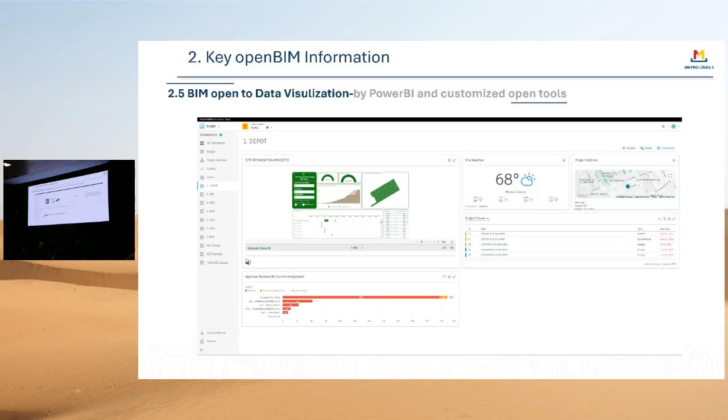So what we are trying to say here, with the help of the BIM open to data visualization, our whole QA/QC procedure, especially from the information perspective, has been improved quite a lot. As we just mentioned, with the published dashboards, we can literally open the BIM to our data visualization and further to every person. I'm going to illustrate the key outcomes as below.

First, we have achieved substantial openBIM data metrics. Up to now, almost 2,000 IFC models are created and 40 contractors from 6 countries are involved in our CDE. And over 13,000 BCF issues are created and visualized in our dashboard, and over 100,000 IFC entities with defined attributes are developed. Thus, our 4 openBIM initiatives are realized in our project.

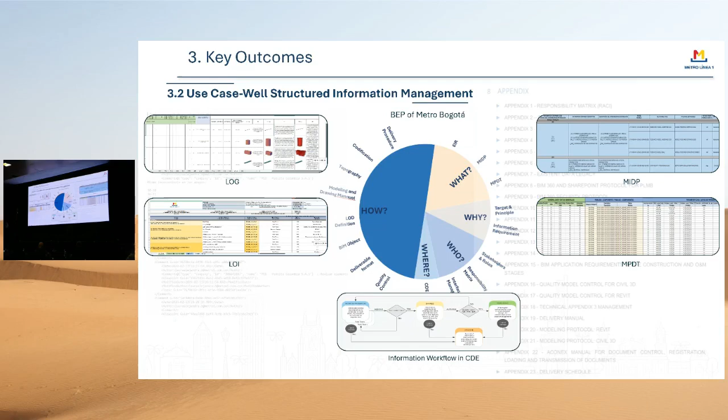And besides, we have achieved well-structured information management. As we all know, the essence of BIM is about building information management. Hence, in the BEP developed, we have further developed the well-structured information standard. For example, we have developed the MIDP, the level of geometry, the level of information, and the master production delivery table. And also, following ISO 19650, the CDE has been established in our project so as to guarantee a smooth flow of such quantity of information.

And next, we have achieved 4 automatic information exchange use cases. They are the efficient information quality check, the seamless information exchange between Civil 3D and Revit, the automatic federating models, and the last, innovative project progress control based on the CDE and plugins. Here, I just want to emphasize a little bit more about the last point. With the help of the data connection platform, we have enhanced the actual progress data and the planned progress data. So by comparing these 2 data, we can literally conduct the project progress analysis and hence the project progress control.

The last part, we also have achieved quite a lot of quantifiable BIM values with the help of openBIM. For example, we have achieved increased relations with our clients, which is quite important, not only for me, I think for everyone. And also, we have cultivated quite a good BIM culture in the whole project. And also, we have achieved increased efficiency, and we have achieved enhanced quality control.

The last, we have achieved a positive environmental impact. As we always say, last but not least. So I'm just going to emphasize a little bit more on the last point. With the help of openBIM, and more specifically with the help of the gbXML file, we have achieved quite a lot in the sustainability study.

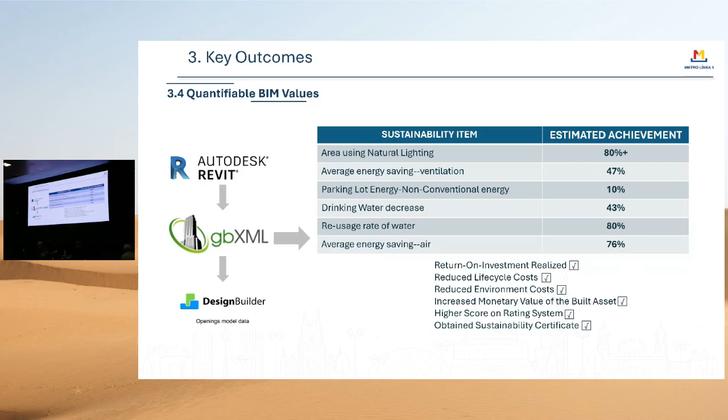For example, we have achieved the reduced life cycle cost, the reduced environment cost, and also we have obtained a sustainability certificate back home in Bogotá. Here comes the last part about the participants and contact information. Empresa Metro de Bogotá, the appointing party, is our client, and China Harbour from China Communications Construction Company, the concessionaire, is the lead appointed party. As for the major appointed parties related to BIM, they include WSP, Zhixing, UCD, and ENG.